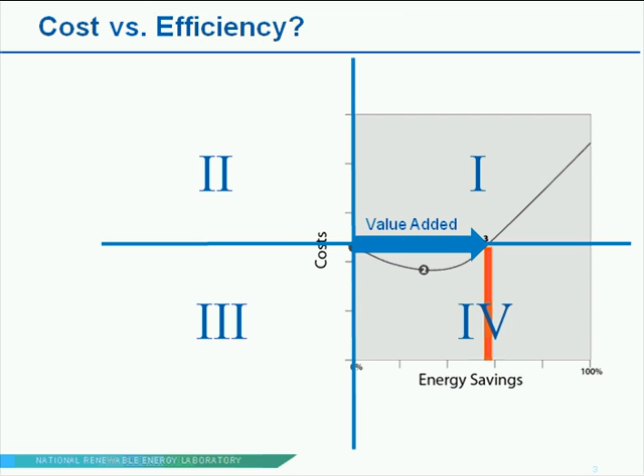So moving on to the next slide, we started with a vision for our research support facility—we wanted to showcase high performance design. But like many other projects, nobody was going to give us extra money to do it. What we wanted to do was get the best ideas together in a cost model that everybody could agree to, incorporate those best energy efficiencies, and get all the pieces to work together as an integrated building—that is, procure the whole building as a single building. It serves as a model for cost-competitive, high-performance commercial buildings, and we hope others will learn from this building and the things we've learned in procuring this project.

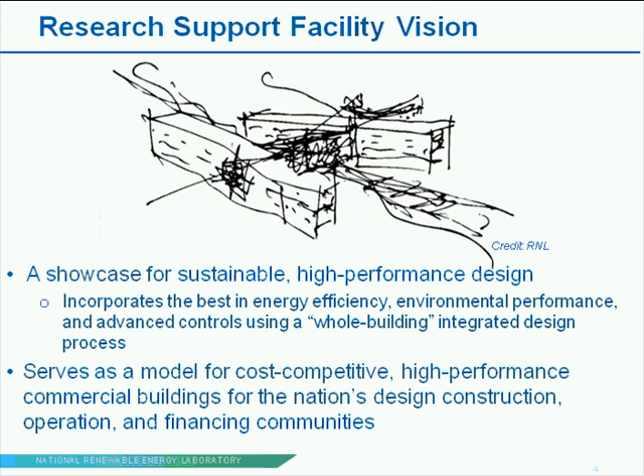Jumping right into some of the stats on size and such—this is what's called the Research Support Facility, or RSF, our acronym. It holds 824 support staff for the National Renewable Energy Laboratory: our communications group, human resources, executives. It's a headquarters and support office space. Some researchers who are at their workstations most of the time are also in the building, but we don't have any labs. There is a data center and lots of conference rooms and things like that.

So it equals around 220,000 square feet, and it was procured with an energy goal as part of the RFP at 25,000 BTUs per square foot per year, which is roughly around the 50% savings Paul was talking about. Construction costs—we'll go more into this later—but at roughly $259 per square foot, move-in ready. That's all the interiors and finishes, the whole building construction cost, and we'll get into the details of what that really is.

LEED Platinum in the contractual requirements, as Paul talked about—we're really focused on a replicable office building, not necessarily something only NREL can do, because we have researchers in the building. The efficiency technologies really wanted to be a process others could use, technologies available out there in the industry, and really focused on cost-effective high performance.

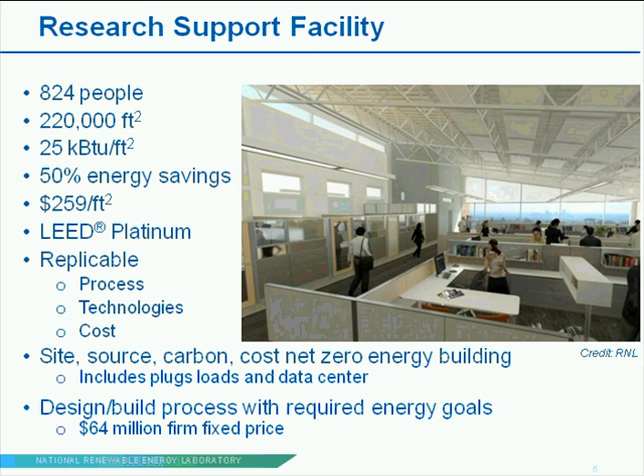Net zero energy was one of the early requirements. We'll get into details of how that was approached, and what was really unique. Not really unique technology, but unique in the process, and it forms the foundation of some of our best practices. This is what we call an energy performance-based design-build process. That's a firm fixed-price contract with required energy goals, and it forms the foundation of a lot of these best practices.

Some general concepts we'll talk about: it really is first to focus on the most cost-effective efficiency strategies to get to net zero, and then we can talk about adding renewables, which are typically significantly more expensive than a lot of the well-integrated efficiency strategies.

When energy efficiency is part of the contractual requirements, unlike in traditional design where architectural or conceptual designs are developed and then energy efficiency is added through a payback analysis period during the design process, energy efficiency really drove the early architectural concepts, based on a lot of early energy modeling to help teams understand the most cost-effective early design concepts to incorporate.

Quick review of some of the strategies incorporated: things like optimal orientation and fully daylit office space, natural ventilation, and radiant heating and cooling. We'll get into details of how to incorporate that on a competitive, first-cost basis. There's a fair amount of strategies to preheat outside air, whether it's data center waste heat or exhaust energy recovery, some significant plug load control strategies, and then site-based rooftop and parking lot-based PV to net out the remaining loads to get to net zero on an annual basis.

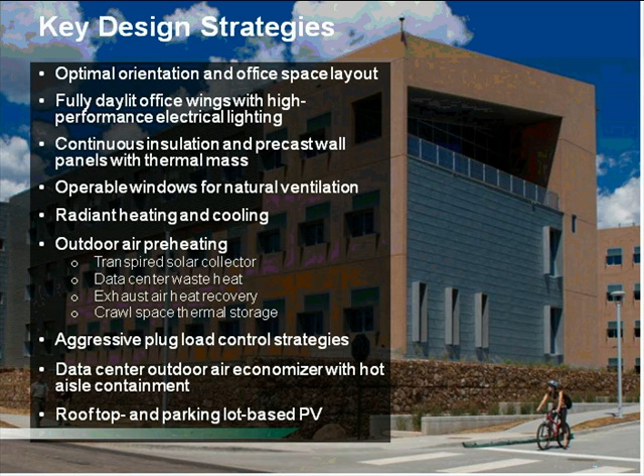So the first best practice, and you'll see throughout our presentation today, we'll organize our best practices in a slide similar to this. We'll talk about what the best practice is, go into some general concepts, and in some cases examples of how the RSF incorporated this.

The first best practice is really about selecting a project delivery method that gives you the best value and cost savings just from the project delivery process itself. So DOE and NREL went out and tried to find the most streamlined delivery process we could, and that led us to a design-build process, specifically a performance-based design-build process.

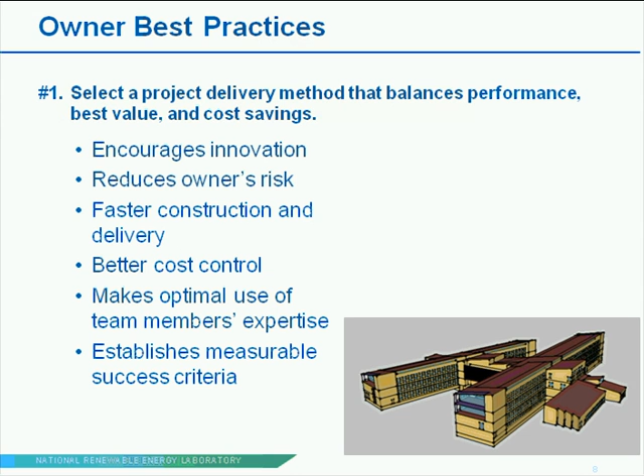The industry has told us that process has things like better cost control and faster construction and delivery. Anytime you can build a building quicker, there's lots of money to be saved by streamlining construction processes. So a lot of the strategies you'll see here are really about reducing the amount of time in the field that a building takes to be built, and reducing that first cost. It also establishes measurable success criteria, which is great for any project, and if you incorporate energy efficiency into that, even better.

In talking about that measurable criteria, the first part is to establish what that performance-based energy use metric is going to be. Measurable goals are always better. There's a lot of buildings being procured out there where people say 'I want a green building,' and yet everybody can deliver it, but nobody really knows what that means.

Helping to put definition around that are things like the LEED rating system by the U.S. Green Building Council. That starts to put some definition around it—at least people have an idea what the end result is, and they can go out and get points and get the rating from the U.S. Green Building Council. But if you really want to focus on the energy piece, you want to talk about designing a building that uses, say, 30% less energy than an applicable code. That's better, but it still kind of goes back to a reference

baseline. What you would prefer to do, though, is translate that into an actual energy use intensity. For the case of this building, we used 25,000 BTUs per square foot as that metric. So at the end of the day, we could go back and verify that the building is actually performing according to how it was designed and according to that target.

Now, a more aggressive goal would be to say, design a net zero energy building. That, in essence, is the same kind of measurable goal—we know how to define it, we know how to measure it, and if you want more information on how to define it, you can go to nrel.gov and look up some publications specifically related to this topic. All of these things are about influencing the purchasing decision and helping the owner define what they want, and then making sure they procure a building that gets them what they want.

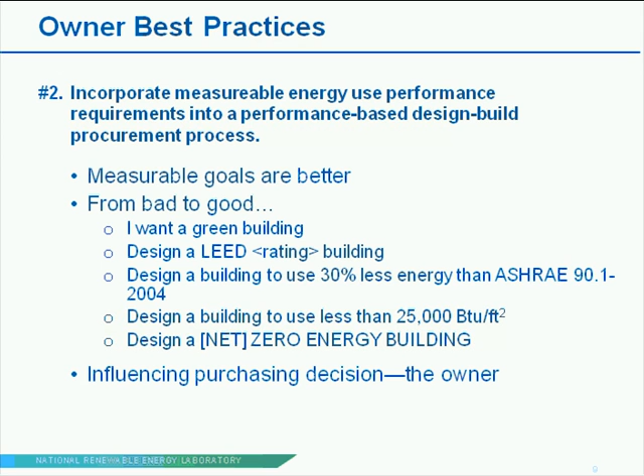So for us, what this took, that concept took the form of what's called a performance-based design-build process. This was basically an RFP that had absolute energy use requirements, that 25,000 BTUs per square foot per year that Paul talked about, in the contract and in the RFP.

And so how this is different than typical design build is that these are not what are called bridging documents, where you hire an architect to develop a conceptual design, then you take that out in an RFP and put those drawings into the RFP and hire a design build team to finish someone else's design.

This is really about putting performance specifications into an RFP and allowing the design build industry to come up with the optimal solution to meet your performance requirements. This is really about what something must do and not what it must be. That's a key concept in applying this.

And you do have to have substantiation requirements to prove that what the design build team has come up with will meet what you want it to do. But that also means that the owner has to really step back from their normal involved process in dictating the look and the feel and the design, because it almost always results in something that's more expensive and less integrated than what the design build team has come up with to meet your performance requirements.

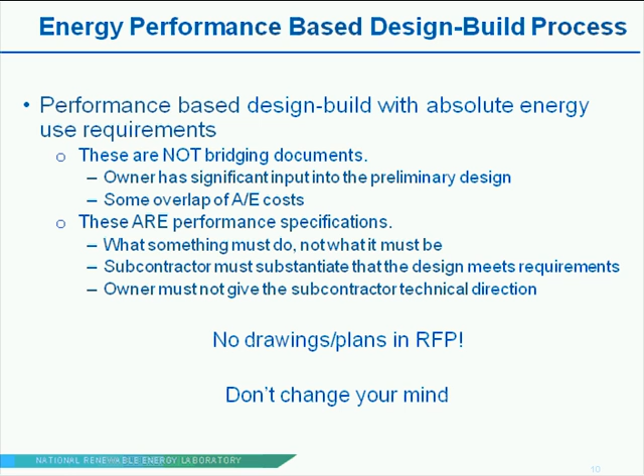What this means is there's no drawings or plans in your RFP, and once you set those out and develop this RFP, if you change your mind, that's going to cost you a fair amount of money as the process goes. So it's really critical to understand what you want up front, so that the design build team can develop the most integrated solution to your problem statement.

Thanks, Shante. I just can't emphasize how important it is to not change your mind during that process and to make those tough decisions up front.

And so number 3 on the best practice list is to clearly prioritize those objectives at the beginning of the design process. In our case, we actually brought in a facilitator to help us do that, to help us tease out what those important things were in our building. And we came up with 3 topical areas: those that were mission critical, those that were highly desirable, and then we had a wish list of things that were in, if possible.

You can almost think about this as a bucket filled with water. At the top of the bucket, using a ladle, you start spooning off those mission critical things. As you get deeper into the bucket, you're going to spend more and more money, and you start going through the highly desirable. We had no anticipation that we'd actually dig or scoop far enough down into the bucket to get the if possible.

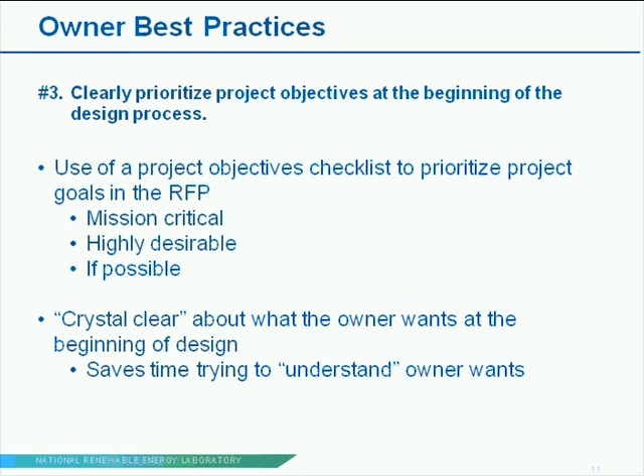It really became crystal clear what the owner wanted at the beginning of the design, and saved time during the process to understand what we, the owner, wanted. So moving along in terms of how these were put together, we did have a fixed cost limit, and that was made very apparent up front.

And looking through this, we prioritized those into the mission critical, the highly desirable, and if possible. What that then did was, as we put it out onto the street, they could look at this design and say, how many of these things can I provide the owner? When we evaluated the design, we asked the same question going down the list.

Let's say that somebody wanted to give us everything on the list except that 5th item, that energy goal that we had set. Then we would actually draw a line above that goal and say, well, you've only given us 4 things that we wanted. We could not reprioritize the list during that competitive process.

I do want to point out also that the way that this performance-based design build process was put together was based on a series of industry best practices on energy performance-based design build. We did a lot of work up front to prioritize this before we entered into a design process, and that really did save a lot of time on the design build team's design effort in trying to understand what the owner wants, because a lot of times in these projects, a significant amount of the early design time is spent just trying to figure out what an owner really wants.

And so by doing that up front and prioritizing that really saved the team a fair amount of time where they could get right to developing the most integrated, cost-effective solution to meet all this scope. The process here is a firm fixed price design competition to find the team that offers the most scope for the firm fixed price contract. That's really how this process was set up.

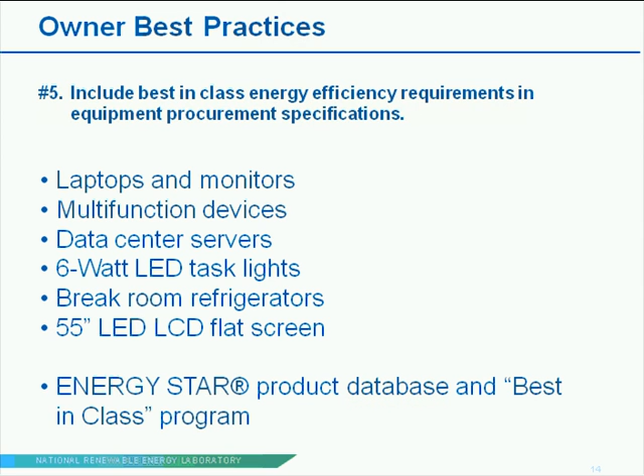In normal refresh cycles of laptops, monitors, printing devices, or data center servers that are always being upgraded, making sure you've got the best-in-class as a minimum requirement as part of your purchasing as an owner. For us, that took the form of 6-watt LED task lights, the most energy efficient refrigerators available in our break rooms, and LED/LCD flat screens in our huddle rooms and conference rooms all over the building, making sure the unit that is standard for that application is the most efficient available. We found the Energy Star product database is a great place to find best-in-class efficiency, and the best-in-class program that Energy Star is launching is a great hope for helping owners find that and incorporate that requirement into their day-to-day purchasing of equipment.

It's important to note that a lot of these plug loads — design teams and contractors often say it's not really their responsibility, but it does impact their overall load. So for things that were the responsibility of the owner, we specified exactly what they were. We went through a detailed listing of what our plug loads needed to be and how to aggregate those plug loads together. But it was also a responsibility of the contractor to install the most efficient equipment where they had control of those plug loads, including things like furniture systems and their lighting.

Here's an example of what that ends up looking like: on a typical day when most people are at work, roughly about 0.4 watts per square foot for a whole building plug load intensity. That's from things like 18-watt LED backlit monitors, everyone having a laptop, and 2-watt phones. 2-watt phones doesn't sound like a lot, but it's a big deal when you've got over 1,000 of them, and the alternative was a 15-watt phone. There's significant cost savings there, especially in PV that we don't have to provide because we went to voice over Ethernet-powered phones.

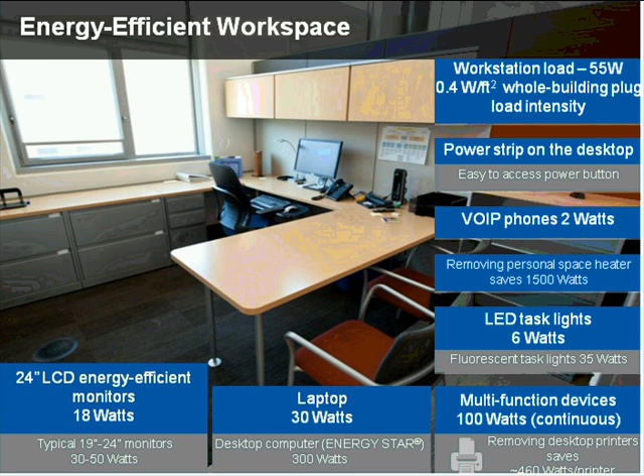All right, let's transition a little bit to some best practices related to design concepts. These are things that design-build teams typically would bring, but it's always good for owners and the whole integrated project team to understand how these save money.

One that we use all the time is leveraging the value-added benefits of efficiency strategies. This means finding alternatives to just energy efficiency alone. Decisions are made all the time that cost money that don't necessarily have a payback, right? So what we're trying to do is find some of the value that can be added to a project.

That's the non-energy benefits. Things like a machine roomless traction elevator, right? When you have regenerative drives on those, they're supposedly 75% more efficient than standard hydraulic elevators. They might cost a little more up front, but if you can integrate one of these elevators into your design, it actually takes less structural requirements and less footprint in your building for elevator pumps and control rooms and such. So it can be done on a whole project basis to be cheaper if well integrated. There's definitely value in having less square footage dedicated to your elevators, right?

Things like laptops for all of our staff. You're not probably going to justify going to a laptop over a standard desktop on a first cost basis, even though it is significantly more energy efficient - the energy savings alone won't pay for that investment. However, laptops are great from a productivity point of view for all of our staff to have laptops to bring into huddle rooms. I'm on my laptop right now in a huddle room in the building giving this webinar, and because I have that laptop, I'm able to do that, and it really increases our productivity and flexibility from bringing our work on travel, working from home on snow days, things like that. A great value added for laptops, and they're 30 watts instead of 300 watts.

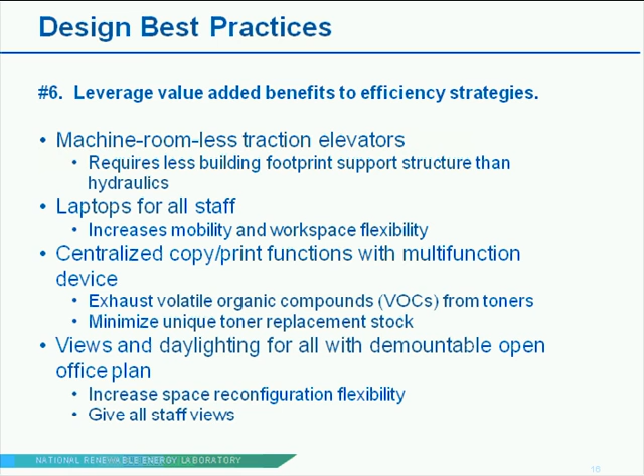So here's a picture of what that looks like. This is one of the office wings. Here you can see this idea about an open office plan, lights off, everyone with the view.

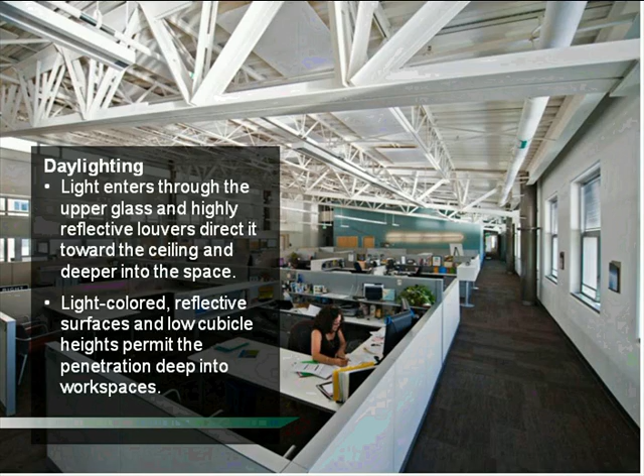Another design best practice the industry has really understood and is starting to implement is the ability to consider the life cycle cost benefits of efficiency. Paul talked about the 4 quadrants and our optimization strategies to find strategies that are in that 4th quadrant. Here's an example of an optimization run that we had done for this building to really get an understanding of how far we could push that energy goal in the contract. And what this told us is that there are roughly 50% savings strategies that reduce life cycle cost, and that if well integrated, it can be done.

It really allowed us to understand things like the cost trade-offs of better wall insulation versus more windows, right? That pull on wanting to have a fully glazed building versus a well-insulated, cheaper wall system building, and knowing those trade-offs and where PV starts to become cost-effective compared to the diminishing returns of additional insulation, and really what strategies become cost-effective as you go towards more aggressive energy savings.

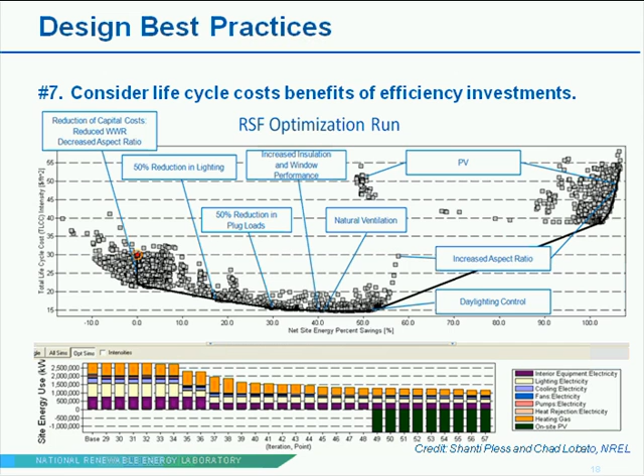Here's a strategy I think is pretty easy to understand, but to actually implement is somewhat of a challenge. It really takes a well-integrated team to do this.

It's really a focus on simple and passive strategies as a core foundation in your efficiency concepts. I think a lot of green buildings have suffered from more technology added on, more controls, more things that move that are responding to changing sun. Keeping those working long term has been a struggle, and the performance of a lot of those buildings that are overly complex has been very difficult to keep running long term.

So reducing your loads first through building integrated strategies such as insulation and thermal bridging, focus on the details there, goes a long way. Getting a good design can be done with no additional cost—just good design and details on thermal bridging.

Effective shading—this is a building integrated passive system that just works. You can see the south facade in the picture there. There's a lot of these little overhangs, fairly cost effective, minimal structure required, but sized to do the job, and will work as long as the sun is in the same position as predicted.

They'll work. So once you've reduced the loads, focus on passive systems—things like transpired solar collectors or daylighting, using your envelope and architecture to reduce loads as far as possible, with no moving parts, or minimizing the moving parts needed. This is really trying to make it as simple as possible.

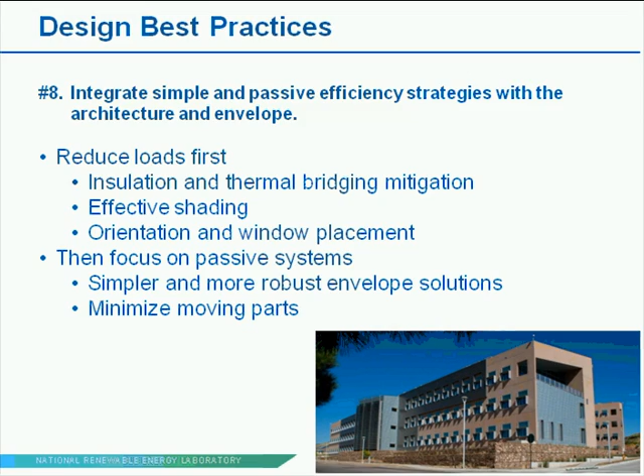Part of that is trying to get the architecture you're paying for to accomplish as many of the efficiency strategies as you can. Things like daylighting or thermal mass are all part of your thermal envelope that a building has to have—they have to have windows, they have to have structure. Let's use those as efficiency strategies as well through good design concepts.

The windows can be oriented to maximize daylighting. The building structure can also provide thermal mass if done appropriately. The building can shade itself through good orientation and siting. The massing and form of where windows are located is a big deal related to controlling costs. If you have a building with all its glass facing west, there's significant cost associated with air conditioning because of that massing decision.

A transpired solar collector is a pretty simple, easy way to use your south facade as an outdoor air preheater, as well as an architectural element. All good architecturally integrated strategies can go a long way in meeting deep energy savings if considered early on in the design concepts.

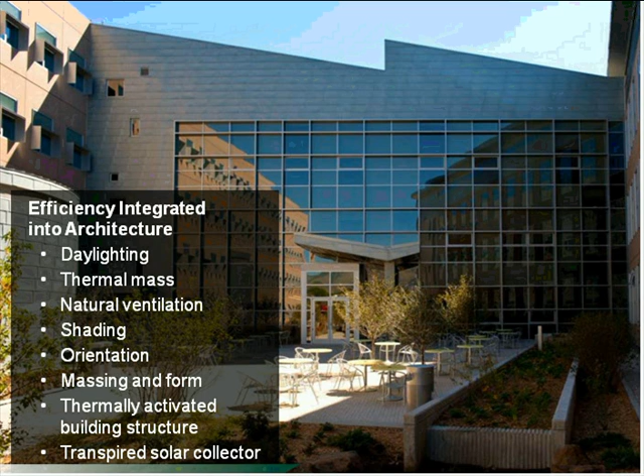Here's some more on daylighting, what this looks like, and how we really focused on it to be a simple system and use the windows we had to do that. The building here—you see a third wing currently under construction—but the first two wings, 220,000 square feet, we've been in over a year now.

Some of the key daylighting concepts here are two long, 60-foot wide office wings facing south and north, with minimal exposed east and west glass. You see some east glass curtain wall there, but it's pushed back into the building a little bit so you have a balcony, a nice space, and significant self-shading that allows the cooling systems to work effectively.

Here's how that daylighting system provides glare-free daylight with no moving parts. It's called a light redirecting device that is engineered to redirect all sun angles up onto the ceiling, eliminating direct glare onto workstations. That's a big deal in daylighting systems.

Often you'll hear the concern: if we have a glare problem with our daylighting, that means we need shades. Then everyone pulls the shades when they have a glare problem and leaves them in that position for six months or a year, and your lights are on all the time, so your daylighting system is actually wasting energy. Then the next common response is, let's motorize these shades so we can bring them back up because occupants aren't adjusting them as they should. It just adds more complexity, more controls, more cost when you could do it passively without any moving parts if well integrated early on.

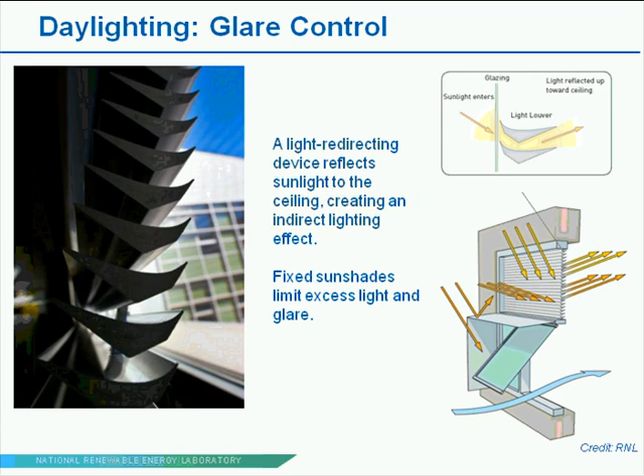Another good example of integrating efficiency into your structural requirements, into the architecture. We have expansive soils here in the Front Range in Golden, Colorado, where this building's located, and so that means all of our buildings cannot have slab on grade, and we have to build on piers and grade beams.

That means you have a crawl space as a minimal structural requirement for buildings here in Colorado, and the design team recognized that and realized there's a lot of concrete in this crawl space. You can see in these pictures during construction they oriented those structural concrete beams so they could pull air through them, creating a great thermal battery of structural grade concrete doing multiple purposes. This is first and foremost the structure of the building, but secondarily, because they were able to integrate this in early on, it becomes a preheating or pre-cooling system for outdoor air pulled through that large labyrinth, as the design team called it. It's basically a crawl space with a fair amount of exposed concrete that can be used to store heat and provide ground-coupled preconditioning.

A quick point about the strategy: if you tried to cost justify this kind of concrete system on energy savings alone, I don't think it could be done. There's a significant amount of concrete here, and a lot of coordination that has to happen. All that had to be done anyway because of the structural reasons and the design solution they chose to hold the building up. But the integration and the additional small moves to make it an outdoor air intake at the same time is pretty effective, and that's a cost-effective solution to make it an efficiency measure from a structural element you had to have anyways. That's some of the deep integration and deep savings you can find if you're able to maximize your architectural integration.

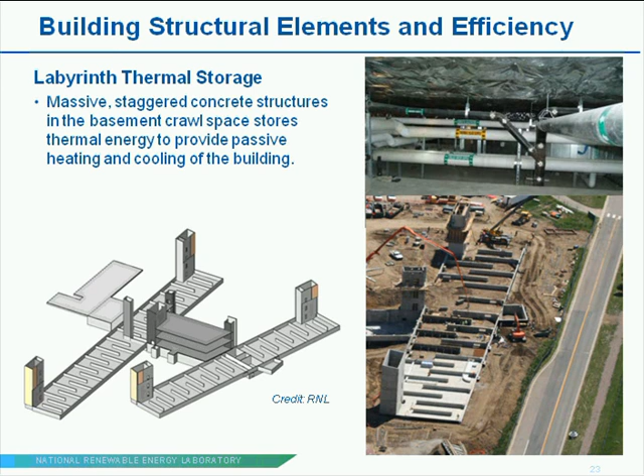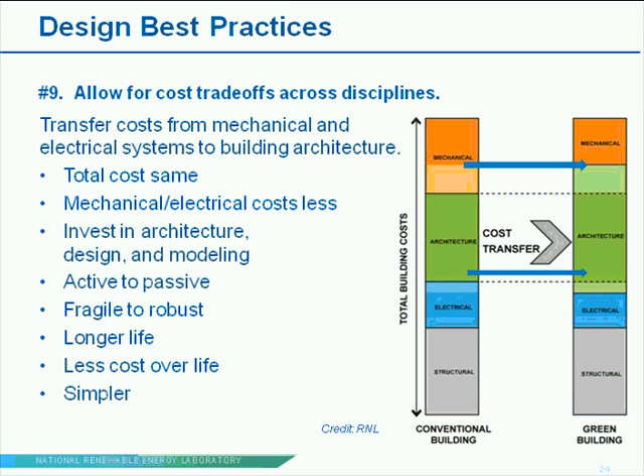A little more detailed strategy related to the design, one that is often questioned by the commercial real estate industry, in that there's a perception that you need a fully glazed office building to have it be a headquarters office building, for example. But from a cost point of view and an efficiency point of view, there's a balance between having views, which is why you want glazing, but understanding that you don't need a fully glazed building, a 100% window-to-wall ratio, to have views.

I think appropriately sized windows—you can see windows in this picture on the east here, those slot windows—provide great views for people looking for a view, no matter where you are, but that doesn't mean a fully glazed east facade. Overall, we ended up around 24% window-to-wall ratio on the south facade and 26% window-to-wall ratio on the north facade. Of that, only 11% of the total wall area is needed for the daylighting windows.

From the daylighting point of view, it's pretty minimal what you need to fully daylight an office space if you do a long, skinny building like this. Roughly 11% of your wall area is needed for daylighting. It's great cost control to meet your energy efficiency strategies. Walls are almost always cheaper than windows, and more insulative, and can be built in precast panels. So it's understanding this balance between views, daylighting, and thermal performance to minimize and optimize the window-to-wall ratio you need to meet your goals—that's a key cost control strategy.

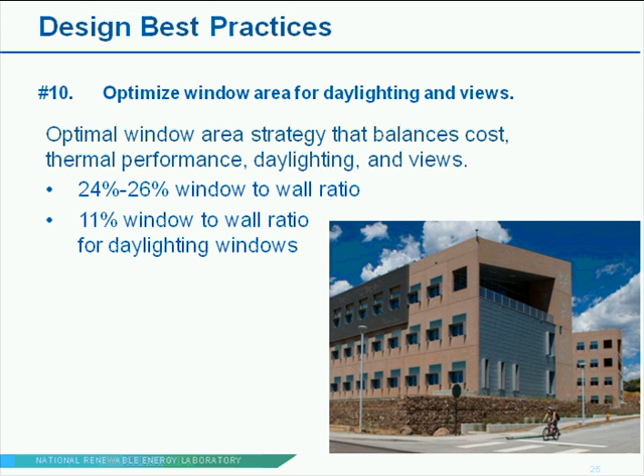All right, number 11. This is also something you'll see throughout, just looking at some of these pictures of the RSF. Anytime you can focus on modular and repeatable spaces, design strategies, components, or design elements of a building, it always reduces cost. So there is really a heavy focus on repeatable, modular design elements—we're trying to minimize some of these unique or expensive building elements.

It's all right to have a lobby, and it's great to have nice, beautiful lobbies, but you have to balance that with minimizing the curved walls in a building. A curved wall is always more expensive than a straight wall, so you see a lot of rectilinear design elements here, and a focus on repeatable office space. Again, the punched windows are part of that—we have over 200 of the same exact south window and over 200 of the same exact north window.

That really reduces the cost per unit of each one because it's highly modular and repeatable. It also allows you to increase your space efficiency. This is a big deal, because anytime you can fit more people into a smaller building—build less for more scope—that's always a key cost control strategy: be more space efficient. Having modular space, designing a building around office space, and having a furniture system that minimizes the square footage not associated with a workstation, conference room, or direct amenity to office employees, helps achieve that.

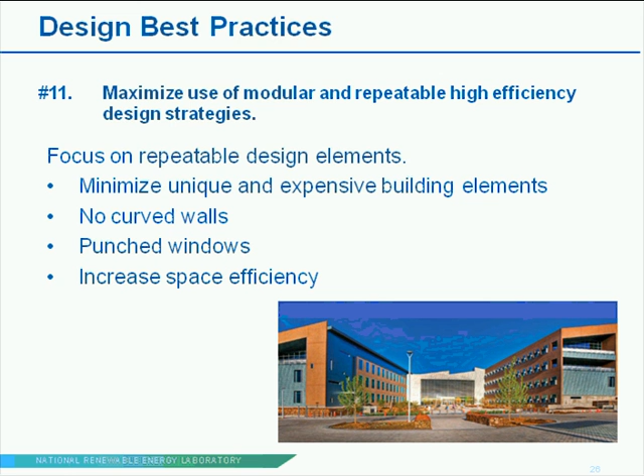So this is what it looks like—this is a rendering from the design team about their concept of a kit of parts, really trying to maximize the modularity of each of the wall sections, the windows, the office space, and each floor area. It really is a lot of parts that are put together and assembled, rather than constructed in the field, which is a great time saver as well as a first cost savings.

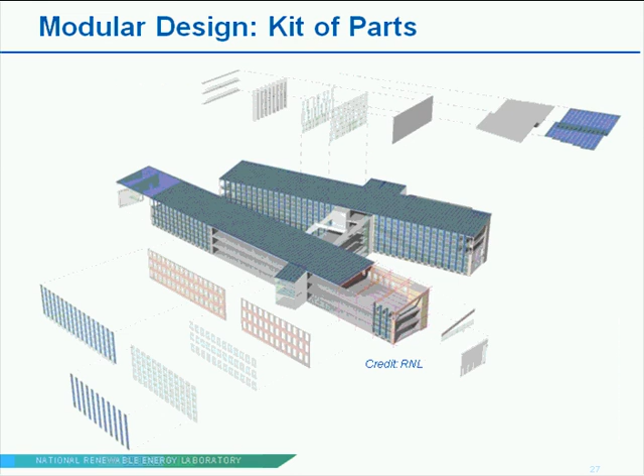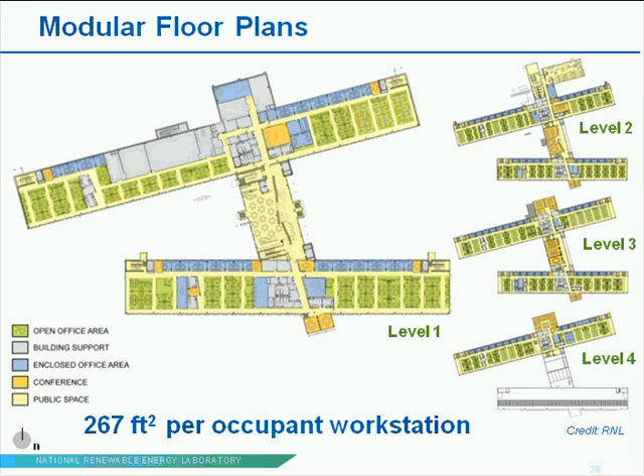Here's one of the floor plans that looks like that—pretty simple rectilinear floor plans. If you can imagine designing one of these modules, around a 30-foot by 60-foot module of office space, making sure you can fit the various cubicles into that module, and then basically extruding that module for as many dollars as you have. You focus your optimization, your design time, on figuring out how to make that office space module the most cost-effective, the most efficient.

You do that once, and you've got your final solution—you can extrude that throughout because you have these modular office spaces. It reduces drywall costs significantly, because you have all these precast wall panels that are just painted white concrete. A lot of attention is paid to making sure the concrete has a high finish, so that when you paint it, it looks just like drywall. It reduces drywall cost and really minimizes the number of trades needed to complete a finished product.

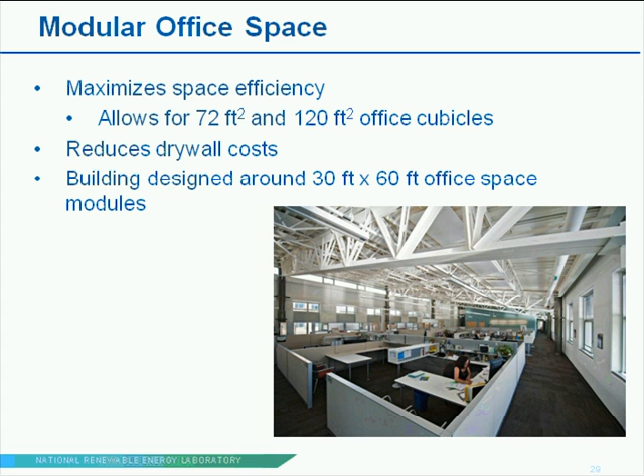I also want to point out, related to space efficiency: when you have an open office plan like this, you're in a 72 square foot cube, which is pretty small for our standards—smaller than our space standards initially required. But in an open office plan where you can spill out into the hallway, it actually feels a lot bigger, and you don't necessarily notice the smaller 72 square foot cube compared to the 84s we came from. That allows you to fit more people into a smaller building, which is significant cost savings. So space efficiency is a big deal, and modularity of the space allows us to do that.

That firm could then take the tax credits and the rebates available so they could make money off selling us renewable electrons from the PV systems on our building. So there was a key strategy in finding these alternative finance mechanisms to reach net zero. I think we incorporated all the efficiency in the base price, but to go above and beyond to get to net zero, it was really finding alternative financing. It was a key best practice for us to reach that net zero goal.

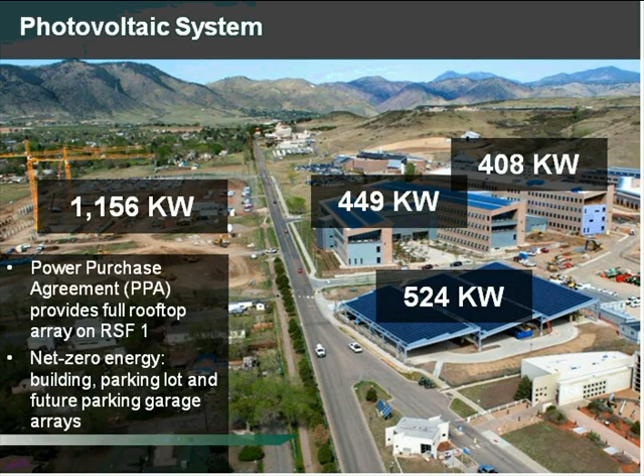Wrong way here. Let's go the other way. We did that one already.

All right, so getting to some of the construction best practices that wrap up the three main audiences here. Anytime you can build something off-site in a modular way and then truck it or bring it to your site and hang it and assemble it on-site, it results in faster site assembly for sure. It increases quality and reduces construction time and therefore construction cost if you can, in parallel, build everything off-site in modular systems and bring them to the site and erect them. It also minimizes site coordination and on-site safety concerns. It's a big deal in the delivery and fast-track process of these buildings, and we're really trying to save total days to build a building and get some of those cost savings to invest in other strategies.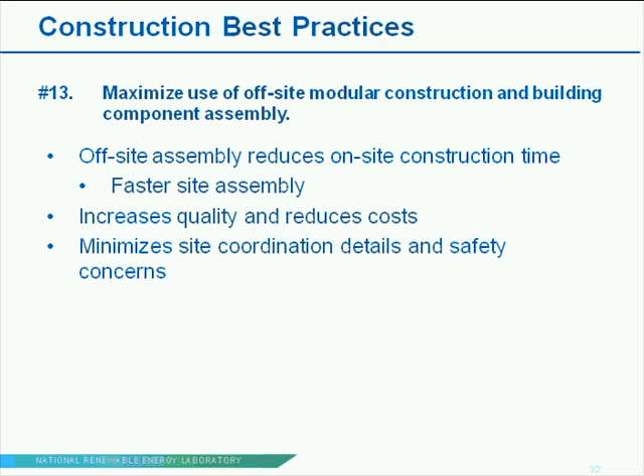Because the building is this long, skinny, 60-foot cross-section, we have roughly twice as much envelope as a typical 120-foot plan office building, so cost control strategies and reducing those costs of that envelope are really key in things like off-site modular precast wall panels that are trucked to the site and hung with a crane. It's amazing how quickly the building goes up with these precast panels.

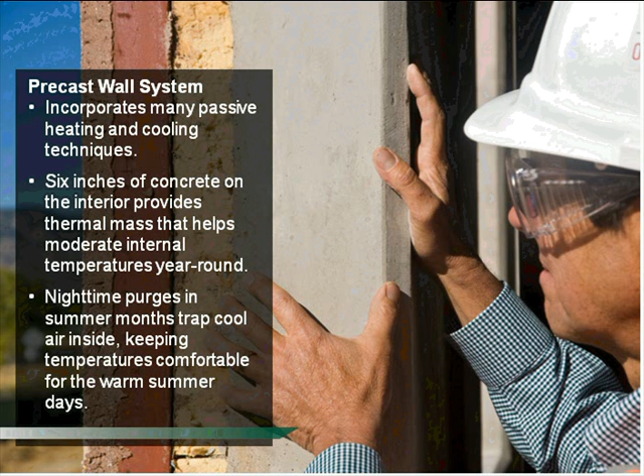It is important to note that the design build contractor brought a lot of this innovation to the project, figuring out how to streamline this and make those costs work within a budget they promised to achieve as part of the project. And they got better as they went, they figured out how to glaze the precast wall panels off-site even.

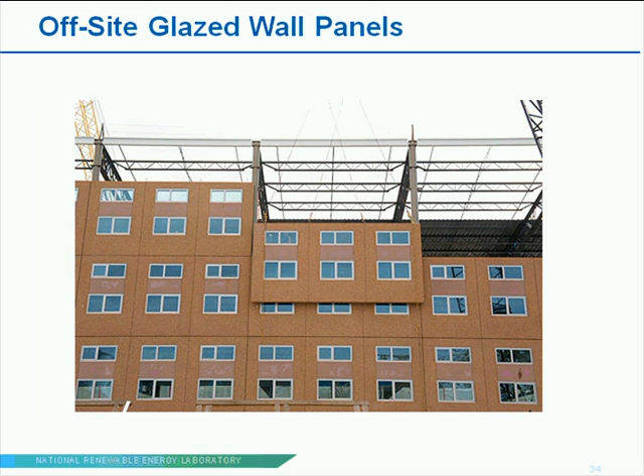So on the heating and cooling side, there's over 42 miles of radiant tubes embedded in the ceilings of the metal deck, and as you can imagine, that has to be well integrated to fit in with the fast track construction process of the structural decks and the concrete decks, so they had to figure out a way to integrate that installation process in a fairly seamless way.

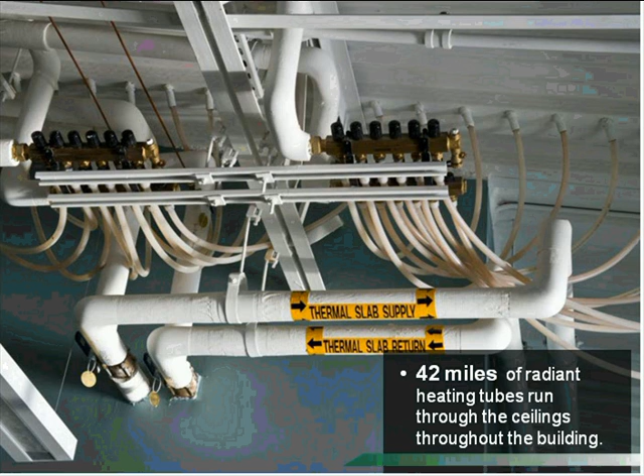They would have been there for months installing 42 miles of radiant tubing in your typical conventional process. What they were able to figure out was an off-site coil system where they plumbed up these rolls of radiant tubes off-site, pressurized them off-site with air, so they knew if there was a burst during construction. They rolled out these mats pretty quickly as part of the normal structural sequencing of the floors, walls, and steel structure of the building, and were able to fairly cost-effectively construct these mats off-site, saving a significant amount of coordination time trying to figure out how to get 42 miles of radiant tubing into the structure.

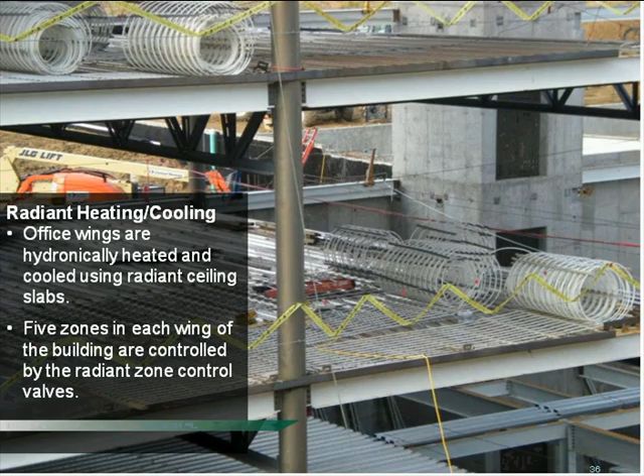So we've got two more best practices here. The 14th one is associated with what Paul talked about: this value engineering effort.

Value engineering is typically seen as something you do when you're over budget and trying to reduce costs at the sake of efficiency. However, if you do an effective value engineering process during design development or even conceptual design, with near real-time estimating and value engineering, you can actually get better value during that design development. That's only possible by having the estimators and key subcontractors on board very early, so you can balance efficiency with the cost model and the schedule.

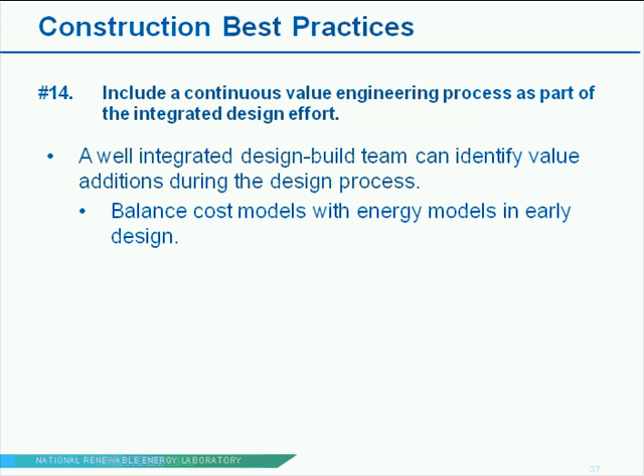Again, a key part of an integrated design team. We actually call this a value addition process.

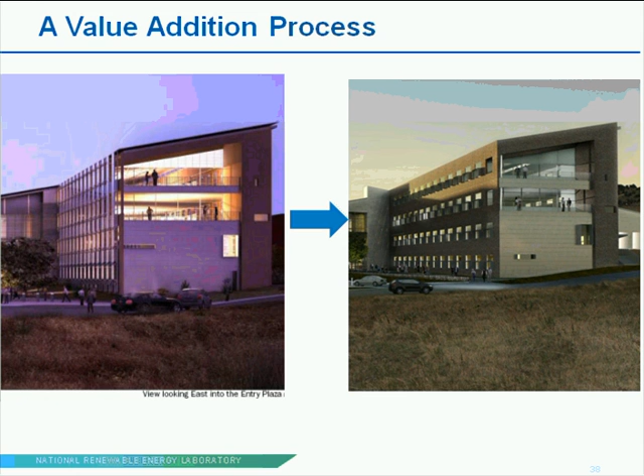So the design build team really had to work to figure all these items out and bring them back to the owner as one integrated package. It wasn't up to the owner to necessarily decide what elements they did or didn't want, as long as it met the performance criteria outlined in the RFP.

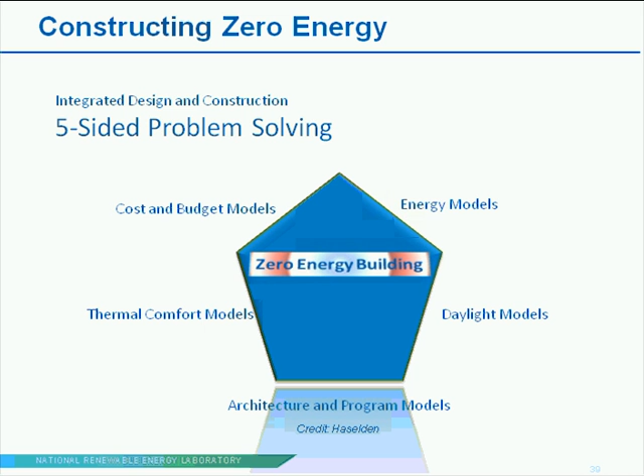And that's really about this idea of five-sided problem solving. You're trying to balance the zero energy building models: energy model, cost and budget model. There's schedule on top of all this as well, but it's also thermal comfort, architectural, and program. All have to be balanced as you go to ensure you're still meeting your energy goals and your cost and budget goals. That's the result of integrated design and construction, and a result of this best practice.

So the final best practice here - I think we've touched on this a little bit, but I want to make sure it's very clear. Having the key subcontractors on board early - the actual firms that will be installing your radiant tubing, the firms that will be wiring up your daylighting systems - having them involved early on when these key decisions are being made is a pretty big deal, because these subcontractors especially really are the constructability test.

If you're going to commit to an efficiency strategy and meeting an energy use intensity goal in a contract, as a design build team contract, you really have to have some assurances of what things are going to actually cost and how they're going to perform. So having the structural, mechanical, electrical, envelope glazing and precast subcontractors on board with a good understanding of these costs before significant design has happened is a great best practice.

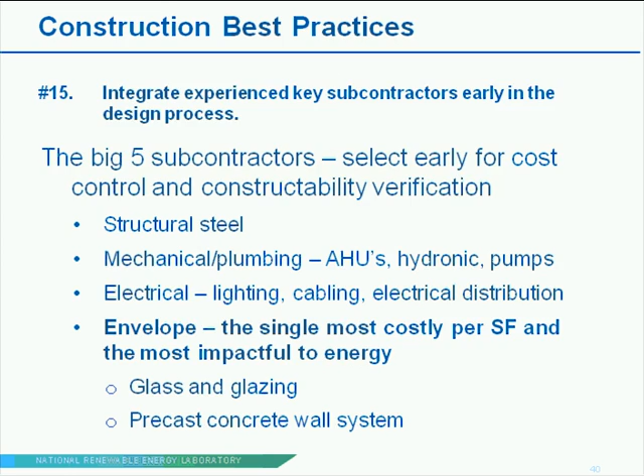So how do we know we arrived at some of the success points? I think one of the key values we saw in the process was that we did receive elements that were not in the RFP, especially on the architectural side, and they didn't necessarily even help the energy efficiency, even though they came in at that same target.

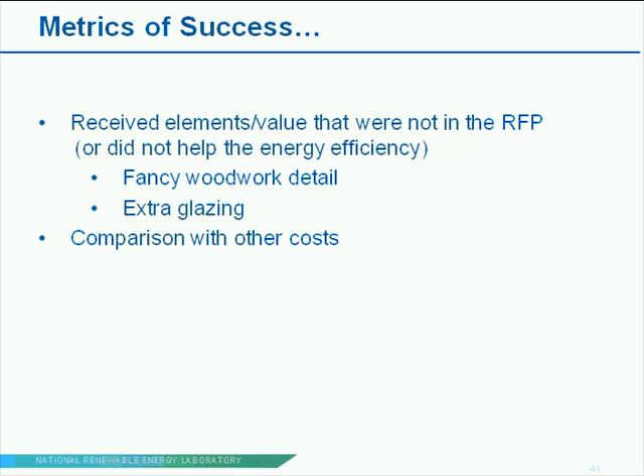So we've got some very nice detail on some of the woodwork. We've got some extra glass on some of the east and west facades that, if you did an energy analysis, would show up as a loser, but they wanted to put those in as part of the architectural amenities of the project. There were pieces there that were clearly in that upper left quadrant, but since they met the overall energy goal, it didn't matter.

We, as the owner, said meet the goal however you need to meet it from a performance point of view. So you see things like the natural gas piping that served as a support, and it becomes a talking point for the building. We also have that woodworking on the right-hand side of this photo, as well as meeting the requirement for getting to LEED Platinum.

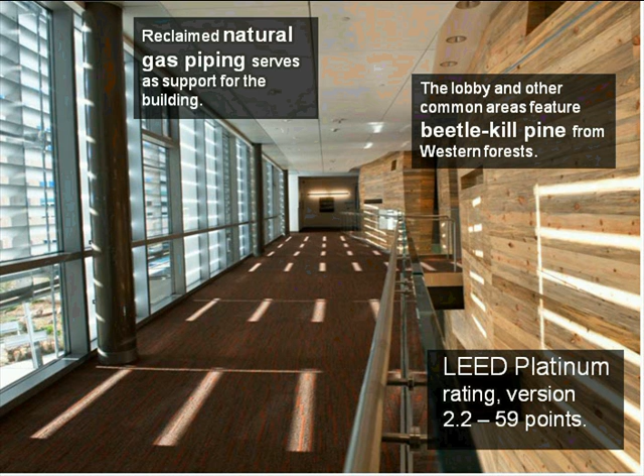So how much did all of this cost? We were given a fixed budget for the project that was part of a congressional line item, as is typical for major construction projects for the federal government. The total cost was $259 a square foot. It included all the interiors, the furniture, the cabling, as well as a lot of extra government requirements they put on buildings, including security and other pieces.

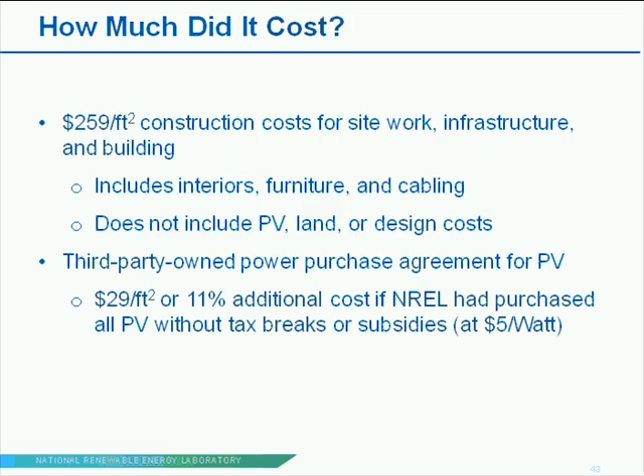It also allowed us to get rid of the discussion about what is the payback. Since it was a fixed price and we were working on that horizontal line and providing the best value, we met or exceeded all the project objectives at our fixed price budget with no change orders during the process, and delivered the project on time. Actually, we delivered it a little bit early. Those construction costs are similar to other institutional projects.

So, Paul, I can take this. Just want to wrap up some of these best practices. It's really about that firm fixed price, finding the teams in a competitive bid environment, and finding the best, most innovative solutions to meet your project objectives at the lowest cost for the best value. You really want to focus on architecturally integrated solutions. You're paying for architecture and the structure anyways, so make them efficiency strategies at the same time.

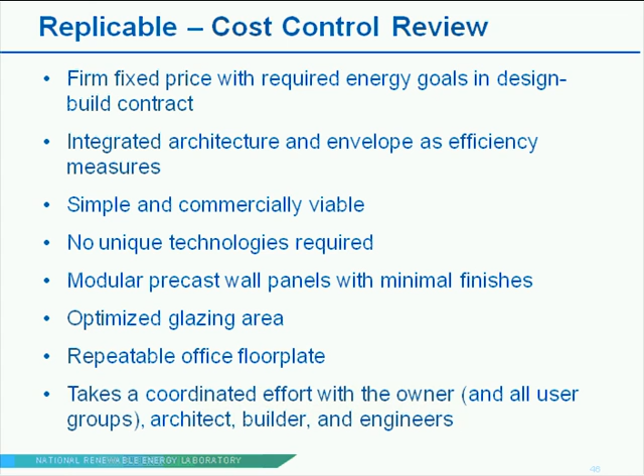However, this is the essence of what the integrated design process allows you to do. It takes that coordinated effort between everyone involved, with the owner and the user groups, to really get this kind of cost trade-offs and integrated design solutions that we know the industry can offer owners to meet their goals, but it definitely takes a different teaming environment.

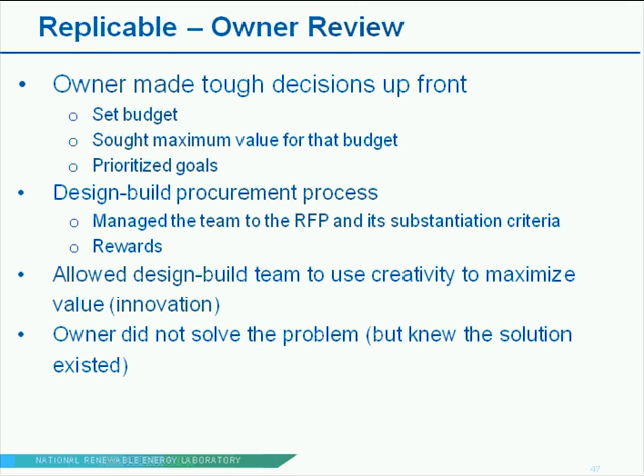Through some analysis we had done ahead of time. So with that, I want to thank you for your time and attention. I think we'll turn this over to some questions and answers.